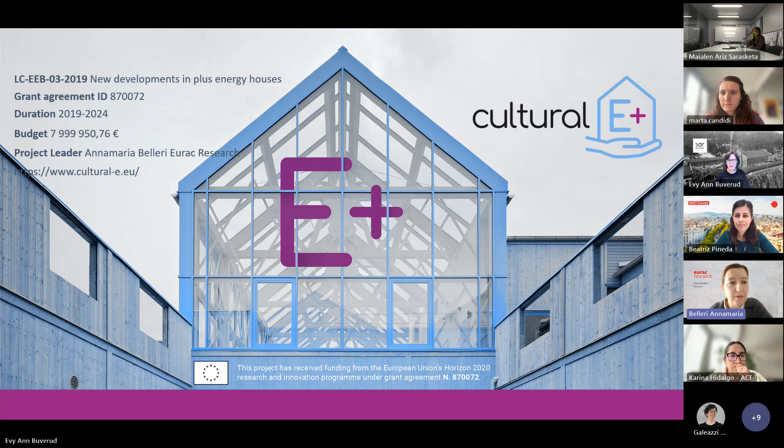We worked a lot on defining what is a plus energy building, and here's our definition: a plus energy building is an energy efficient building that produces more final energy than it uses via locally available renewable sources over a time span of one year.

It's not only about balance, because the plus energy building should also be flexible enough to ensure a good dynamic matching between load and generation, reduce as much as possible the greenhouse gas emissions, and also ensure added value for the users, providing accessible, comfortable and healthy indoor environments.

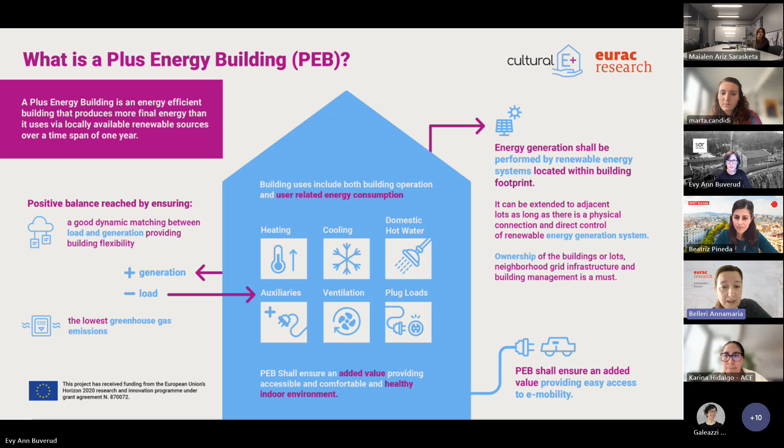The energy generation shall be performed by renewable energy systems, typically located within the building footprint, so typically photovoltaic systems. The location of renewable energy production could also be extended to adjacent building lots, as long as there is a physical connection and the management of the energy generation system is directly controlled by the building ownership. It should also be e-mobility ready.

So the effort done within this project was to analyze a set of solutions that aim at meeting the target of plus energy, but also doing it in an affordable way. In the end of the project, we had 4 demonstration cases located in different climates, but also different cultural contexts.

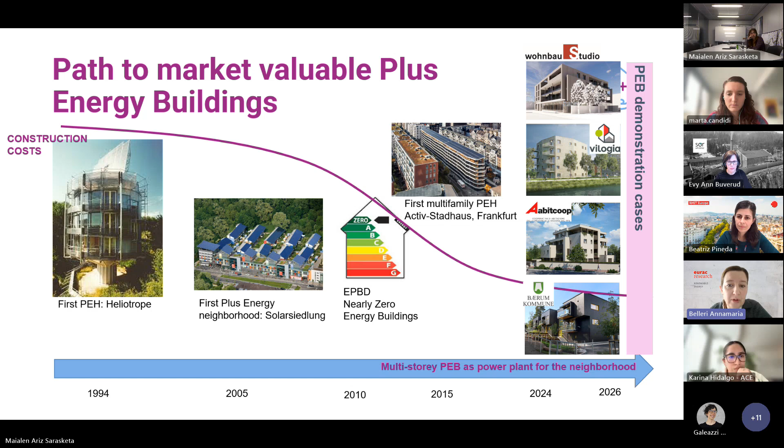One of the main pillars of our work was also to understand the social and cultural differences that characterize the way people use and interact with the buildings.

We summarized all our results in the design guidelines that you can access either through the PEB HUB or through this direct QR code link. We summarized them in 7 key design principles, and that's how the design guidelines are also structured. This document is a kind of easy access point to all the project results.

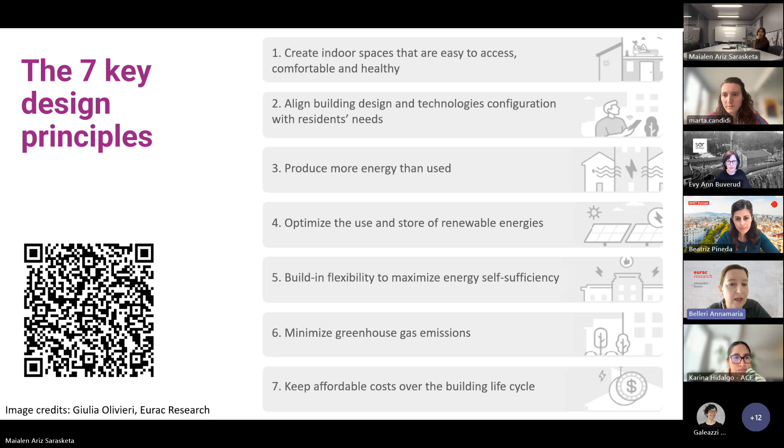If you are interested in looking at the results of the project, I suggest starting from these guidelines, and there you can find also all the links to the other reports and publications produced, in case you want to deepen some aspects related to that.

Here is the link, and I also put the link to our YouTube channel, where you can find the final project event.

Now I'll leave the word to Beatriz for the presentation of the updates on the PEB HUB.

Thank you, Annamaria. As Annamaria mentioned, I will guide you through this Plus Energy Building Hub platform. It starts as a repository, but aims to become a community dedicated to advancing Plus Energy Building design. This is a community for PEB professionals, so architects, but also engineers, researchers, and professionals who in different ways, through their different disciplines, are contributing to this Plus Energy Building new landscape that we are facing in Europe.

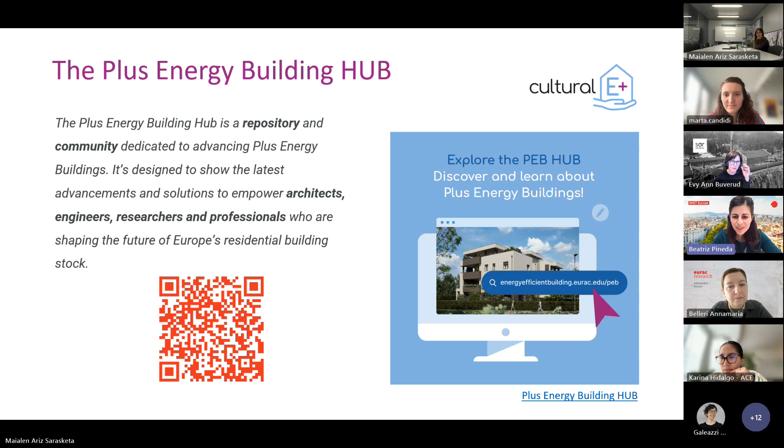This is a QR code that if you scan it will guide you directly into the platform. I will also give you now a walkthrough of the platform, so bear with me, and you will get a first-hand guided tour. But before that, this is just to explain, for those of you who might not have yet visited the PEB HUB, what can you find there.

This is a platform where you can find, first of all, real-world examples of Plus Energy buildings, with details on the technology solutions, performance data, envelope innovations, climate adaptive designs, but also, as Annamaria was mentioning before, this is a project that has paid special attention to cultural and climatic considerations that are also being gathered in the PEB HUB.

This is also for you to check, we will see this in a minute. The design guidelines are also in the PEB HUB, as Annamaria was just explaining. And we have sections of tips by designers for designers, because we think it's very important that designers themselves share practical advice to help and support others who are maybe starting this endeavor to build a Plus Energy building. Then there is also a quiz.

This is a simple interactive explanation of what are Plus Energy buildings, because as you know and are very well aware, Plus Energy buildings are still a niche, and basically we need to also raise awareness among the general audience on what is a Plus Energy building, to inform more non-specialist audiences.

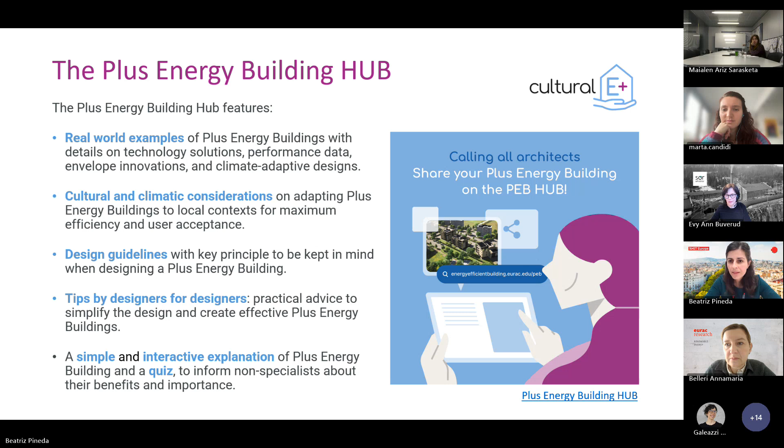So if you go to the QR code and land in the Plus Energy Building repository, this is what you see. It's worth mentioning that the PEB Hub is embedded within an umbrella platform, the Energy Efficient Buildings Hub, developed by EURAC Research. One of the tabs is the Plus Energy Building Hub, but you can also check out the Industrialized Deep Retrofit Hub, which we're not covering today. So we are focusing today on the Plus Energy Building Hub.

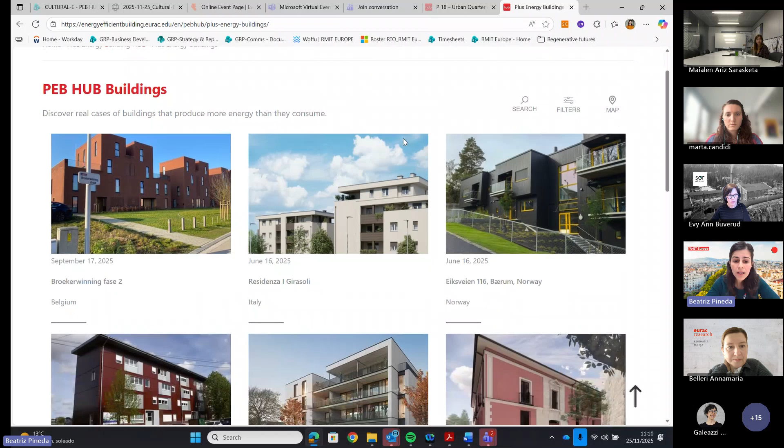Here, as I was mentioning, you can find different real-world examples. Today we will focus on one. For example, we can choose the P18 urban quarter on Priesnitzberg in Stuttgart, Germany.

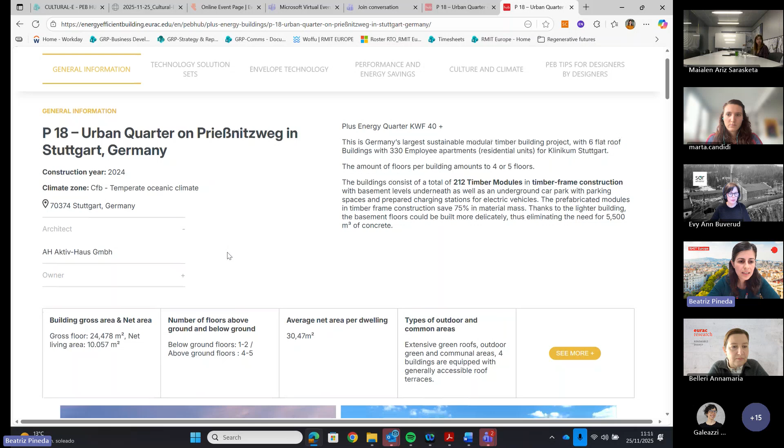This is an example of a designer who has been introducing data on their PEB. Here you can find very straightforward information: who is the architect? In this case, AH Aktiv-Haus, the owner, a brief description of the Plus Energy building, then general information such as building gross area, net area, number of floors, and so on. You can read it yourself.

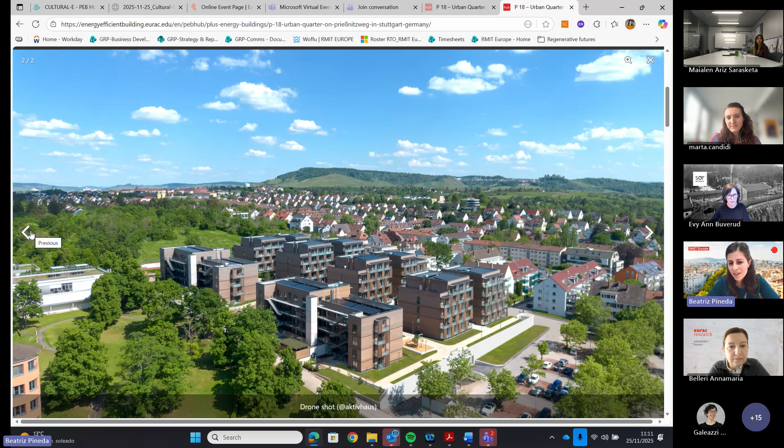You can also go into detail on some of the photos if you click on them. Let me show you this in more detail. By the way, this has been beautifully designed by EURAC colleagues, so thank you to Olga and Ludovica for their hard work on designing such a beautiful platform.

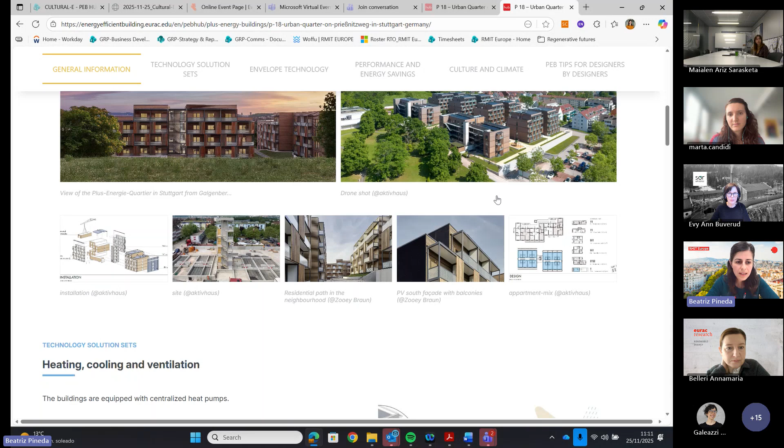Here you can see this bigger, with all the details on installations, construction, and different types of photos that the designers have provided. Then there's the technology solution set section, where you can learn more about heating, cooling, ventilation, building technologies, types of systems, the technologies behind them, and distribution systems.

The designers have also provided information on, for example, primary energy demand and renewable energy production. These are all things you can go through and learn more about this Plus Energy building in general.

Then you have information on the building envelope, with images provided for that purpose, such as wall, roof, window U-values, and other data that's quite important when you design your building and that you can learn from.

And then you have the culture and climate section, where you can understand, by going through this survey that the designers themselves have answered, more about how they've taken into account different practices that households perform when living in those PEBs, such as heating, cooking, ventilating, and opening windows, for which purposes.

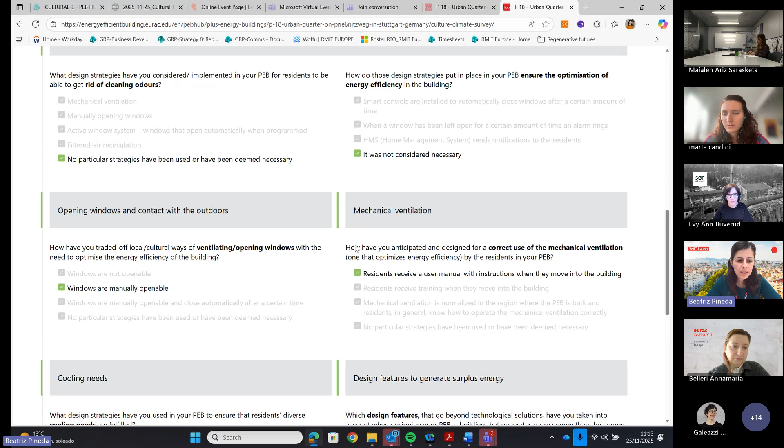To clean, to ventilate when cleaning, or to open windows just to be in contact with the outdoors. There's also information on mechanical ventilation, cooling needs for specific climates, and specific design features that have been generating this surplus of energy.

This is just one example, and of course there are many other examples of Plus Energy buildings in the repository. We welcome your contributions as well, and this is one of the updates we've been working on.

Now, if you go directly to My Plus Energy Building, you can create and update data on your own Plus Energy building. First you have to log in, sign in and create a password, and then we'll provide you access so you can go and create a building.

So you can call it, I don't know, PEB example, and start inserting information directly in a very straightforward way. Thanks again to our EURAC colleagues for this very user-friendly platform.

You can start inputting general information here. You select the type of climate, the country, and the address. As you'll see, some fields are mandatory, others are more optional.

You can add information in the general information section, the same as we've seen before. For the technology solution sets, you can also upload images directly. This is just for you to get an understanding of how you can input this information yourself.

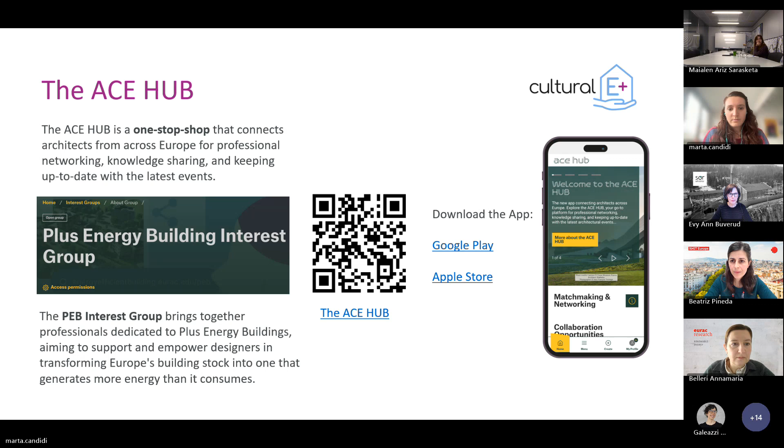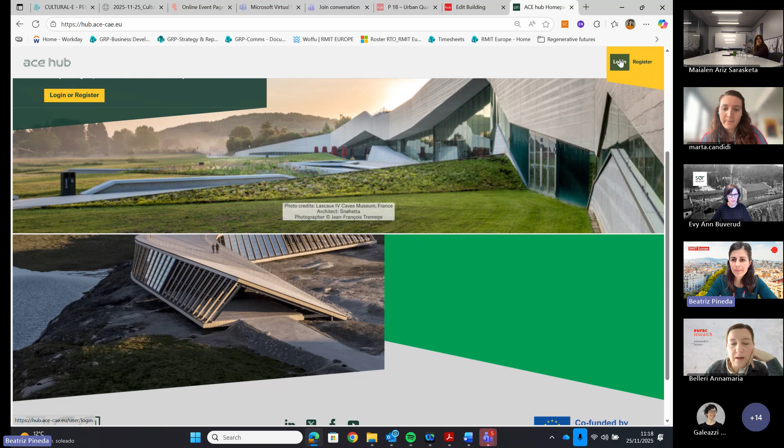Beatriz, can you share the screen? Yes, thank you. Let me know when you see it. Wait a second, the right one, this one. Perfect. I think you need to log in. Yeah, yeah, maybe I have already logged in, so maybe I can share it, Beatriz, if you don't mind. As you wish. Yes, thank you.

Okay, so as you can see, in the meantime, this is like an online platform, but it's also an app that you can download on your phone.

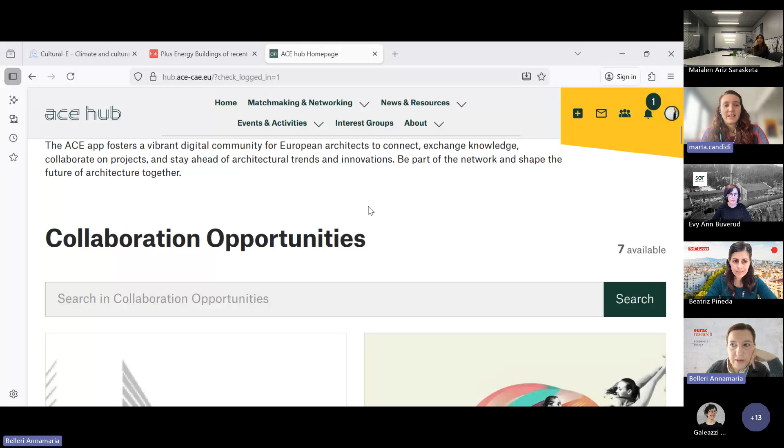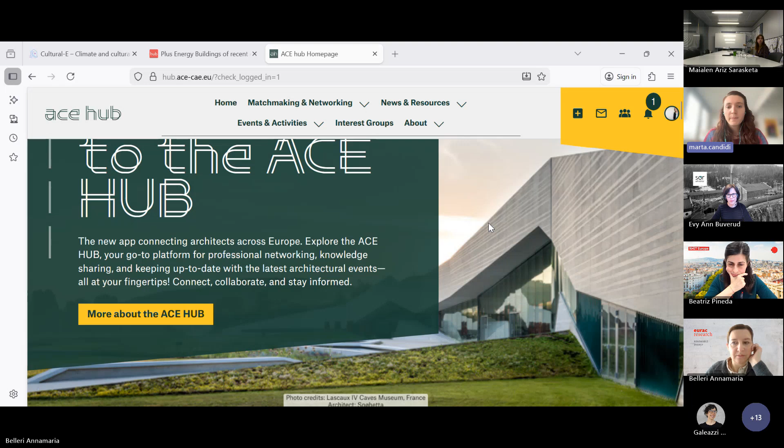Okay, now you see it. Yes. So maybe this is the homepage when you log in, and here you can find all the tabs. Basically, you have the matchmaking and networking part, where you can find collaboration opportunities, job and internship opportunities, and also the users directory, where you can see the members inscribed in the platform. Then under news and resources, you can see the latest news, publications from the Architects Council of Europe, but also from the EU on interesting topics, plus publications that all users can upload. On events and activities, you have a calendar where you can see both past and upcoming events. And then you have the interest group parts.

The interest groups are aimed to be communities that gather people around themes and topics in architecture, and the idea is that they facilitate collaboration and idea sharing. For the Plus Energy Building, we decided to create a community that can gather professionals and give them space to communicate and share ideas.

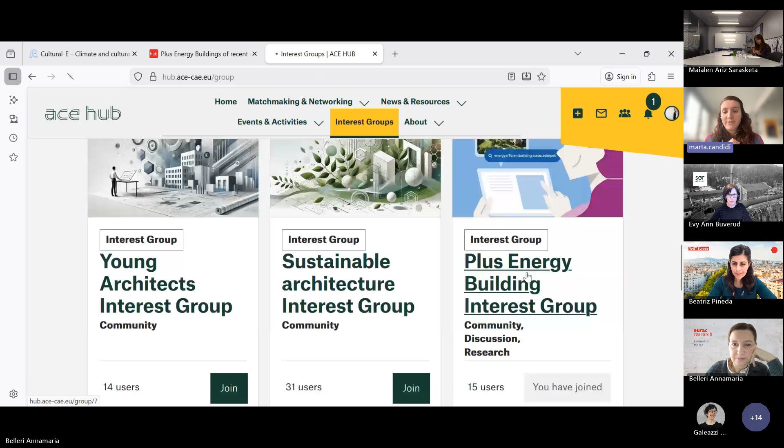Thank you, Annamaria. So if you scroll down, you can find this Plus Energy Building interest group. I will show you briefly how the group works. Basically, when you enter, you have all these tabs: stream, about, events, topic, and users. It works like the ACE Hub in general. In the users tab, you can see who is actually in the group, their job title, where they work normally, and if they add more information, you can see it and connect with them.

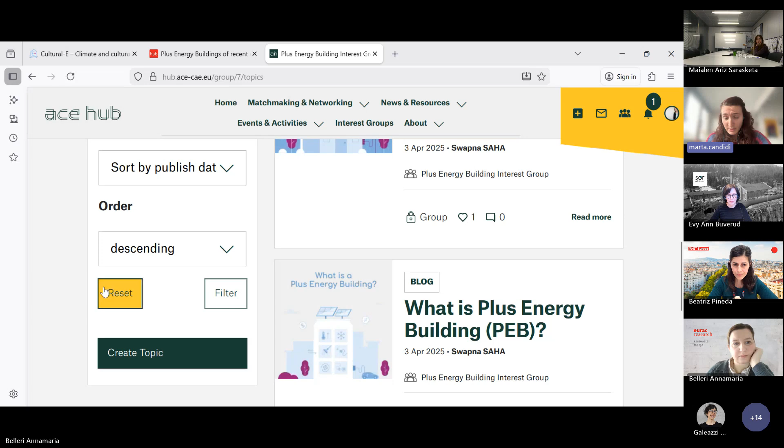Then close to that, you have topics, which is where you can share interesting information. If you go down on the left, you have this create topic button. We are currently working to make this platform a bit more user-friendly, so ACE is working on this, and hopefully next year it will be easier to use.

And then you can do the same for events. If you click now, for example, you see the webinar from today, and you have the same create event option. On about, you just have a description of the interest group. And when you see the yellow part up on the right, there you have all the features to use the hub in general, so when you want to add any kind of item, you can do it there. Then you have your messages, you can see the groups you are into, and then you can see the notifications.

Okay, thank you, great. So I guess now is the time for our speakers. If you can again share the screen, Annamaria, with the presentation. Our first speaker is Evy Ann, an architect and partner at Sør Arkitekter, and she will be presenting the nursing home in Eiksveien, in Baerum, Norway.

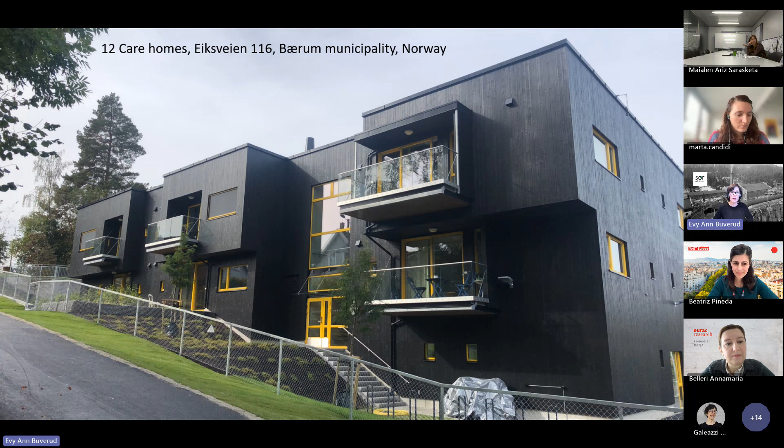Hello, I'm Evy Ann from Sør Arkitekter, and I'm going to present Eiksveien 116 in Baerum municipality in Norway. This is the Norwegian demo project in Cultural E. It is a residential building with care home for people with special needs. There are 12 apartments, located in a rural area in Østerås, about 11 kilometers from Oslo.

It has a lot of welfare technology. The building has a high environmental profile and is built with solid wood constructions. It's a passive house and FutureBuilt project, certified BREEAM-NOR Excellent. It has been a learning project. For example, use of visible solid wood inside the building is demanding in relation to fire and zone regulation in this kind of building, and there was a lot of discussion because no one wanted to take any risk, but it landed at least.

There was a zero emission construction site, and the building is a part of Baerum Municipality Climate Strategy 2030.

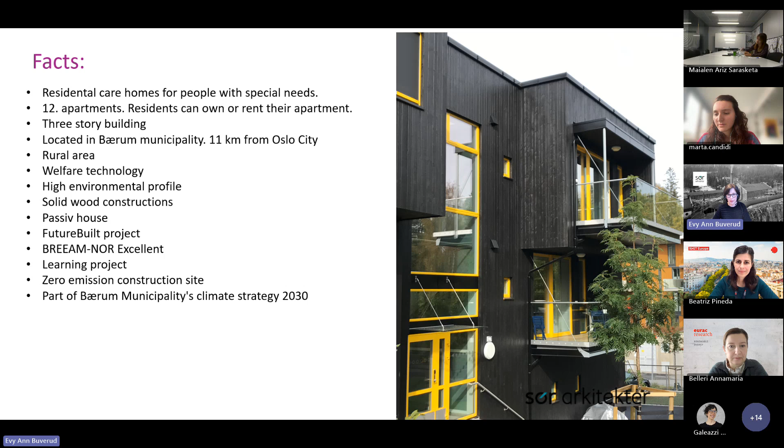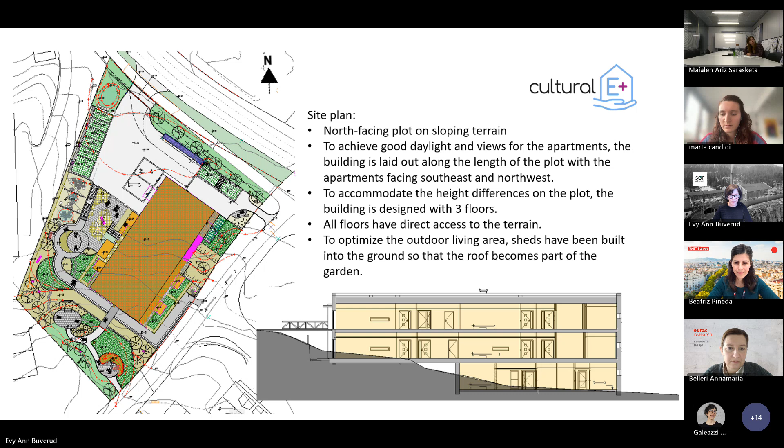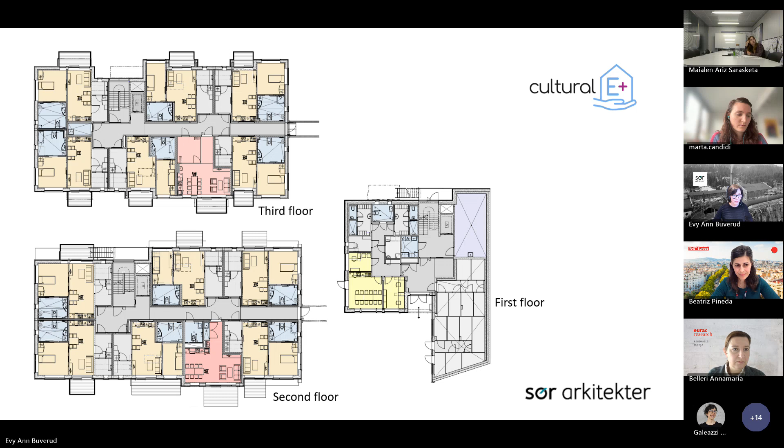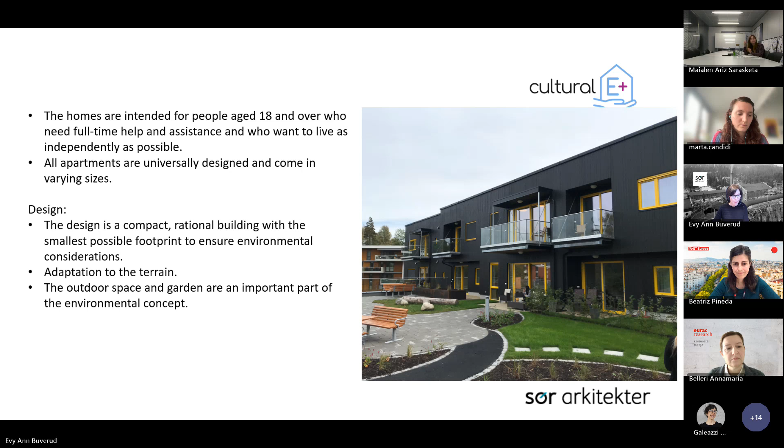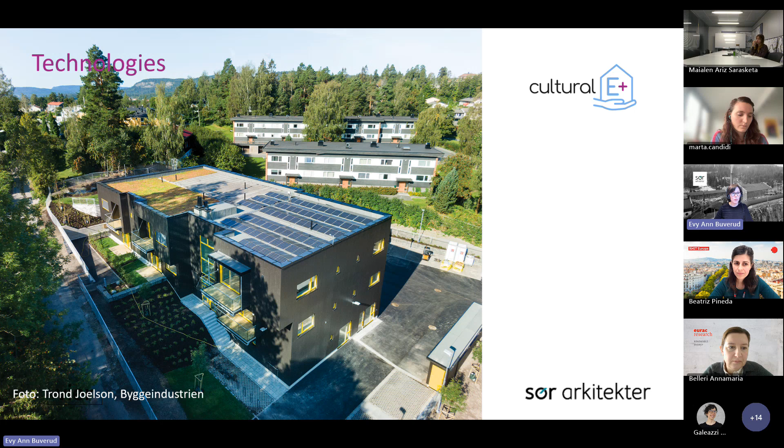There's a lot of technical things in the building, and we have balanced mechanical ventilation with heat recovery, water-based floor heating, hot water from central boiler, and we have AMS to record electricity consumption for each apartment. There's a lighting system with motion detectors in common areas, and the central control and building management system BMS are installed. There's a lot of sensors, high resolution data from 300 sensors. That's quite a lot for such a building.

When we came to heat and energy source, we have a heat pump with electric boiler for the peaks. There are 3 geothermal wells, PV solar panels on the roof, battery storage, and EV charging.

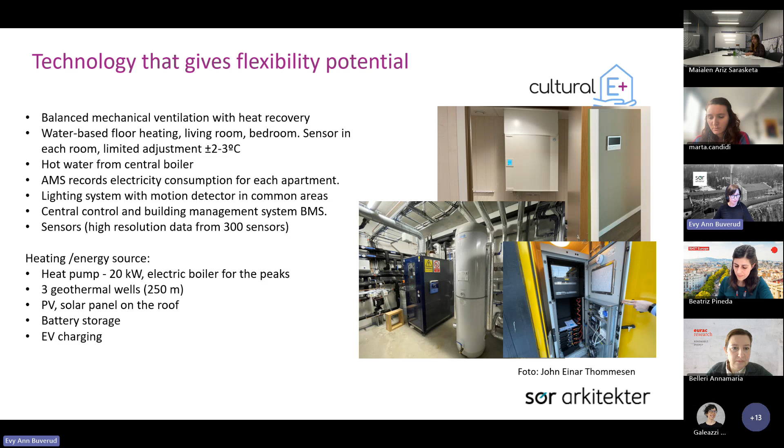There's the building from northwest, and we can also see how the building connects to the different levels on the garden.

So how much energy plus? The building itself is extremely energy efficient, but less than 50% of available surface space on the roof is utilized with PV. With 100%, the building would produce more energy than used. Currently, the building is not a plus house. It would be if the entire roof surface was covered with solar cells. It's prepared for such an expansion. However, the project could then lose blue-green values and score lower on the LCA. So that's a decision which the building owner made.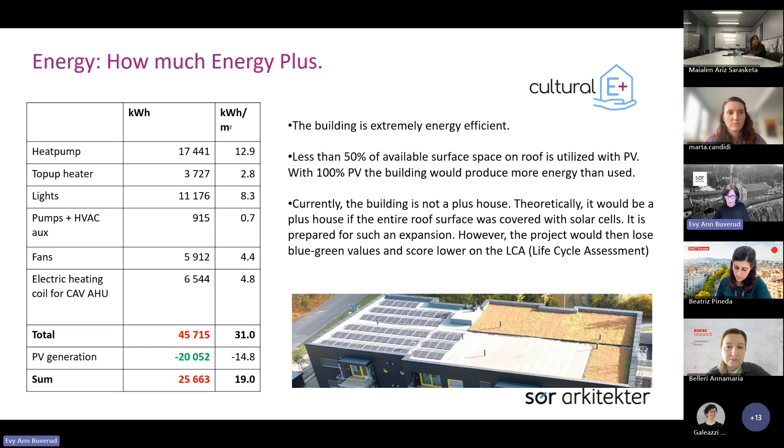So what challenges did we meet? We had a challenge with the design of the building. It was a small sloping north-facing plot with high demands on area efficiency. The design team was established late, so we got very short time frames.

There was also a change of assumption. The battery storage came quite late in the process, and then there wasn't any space left in the building, so we had to find room in the bin shelters. We also had to apply to the authorities for this, and it took some time.

There was also a challenge with technical competence. This building requires technological competence that many residents don't have. These are apartments for people with varying degrees of mental disabilities, and at the same time there's a high frequency of assistants, so it's not realistic that all of them have the necessary knowledge to optimize energy use.

We also have social and cultural conditions. In Norway we sleep with windows open, even during the winter. And in this building, several residents smoke, but in Norway we don't smoke inside, so doors are opened frequently, and that means a loss of energy.

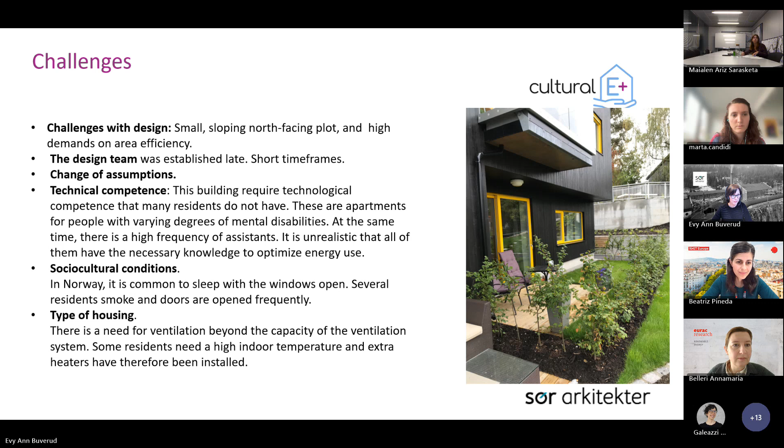So what lessons did we learn? Some of the lessons were that the criteria for energy level have to be included from the start of the design. That's important. And interdisciplinary collaboration from an early phase is important.

Emphasize basic design principles. The shape and orientation of the building affect energy consumption, and we worked a lot with that. Construct good climate shells with high insulation values for walls, roofs and windows. Area efficient solutions are important, and if you initially have a very energy efficient building, the road to a plus house is very short.

We also have to consider who will live here. Advanced technology requires educated residents. So at last, the goal is creating a good building with the least possible negative impact on the environment. This will sometimes mean that blue-green values are prioritized higher than maximizing energy production.

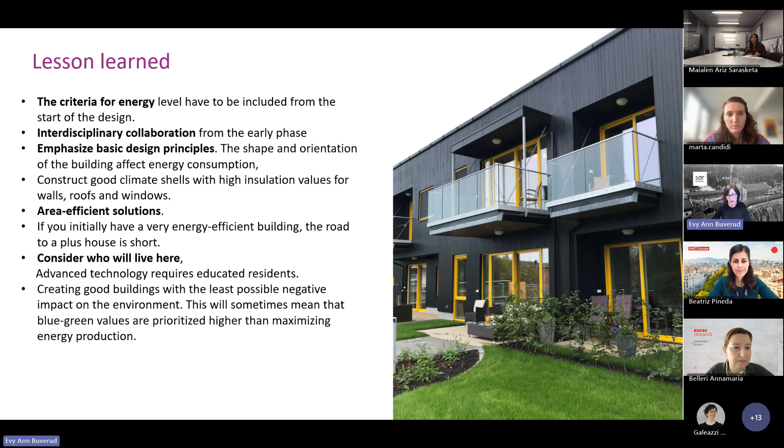Thank you, Evy Ann. Thank you very much for the presentation. I think it shows some of the challenges and the trade-offs you were explaining and making, prioritizing, optimizing energy production or valuing other aspects more. I think these are good points for the discussion.

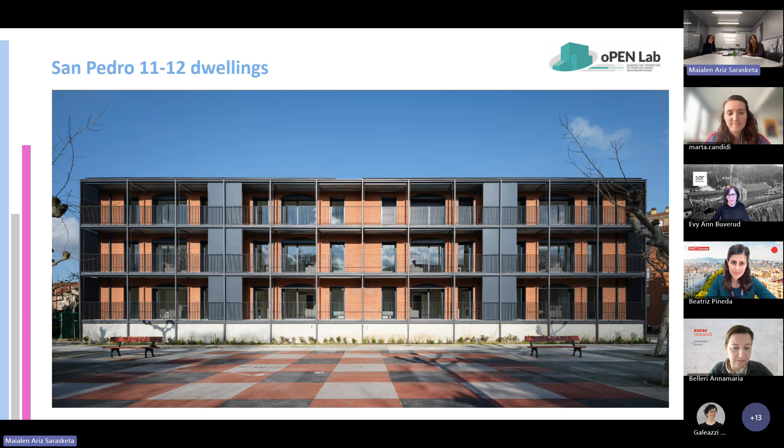This is the building we are going to speak about, and this is a current photo of the building. We are going to tell you how we transformed a 1950 building into a plus energy building.

First of all, I would like to tell you a bit about the location. The building is located in the city of Pamplona in northern Spain. This is a working class neighborhood, one of the oldest neighborhoods in the city from the 1940s, and also one of the most crowded neighborhoods in the area.

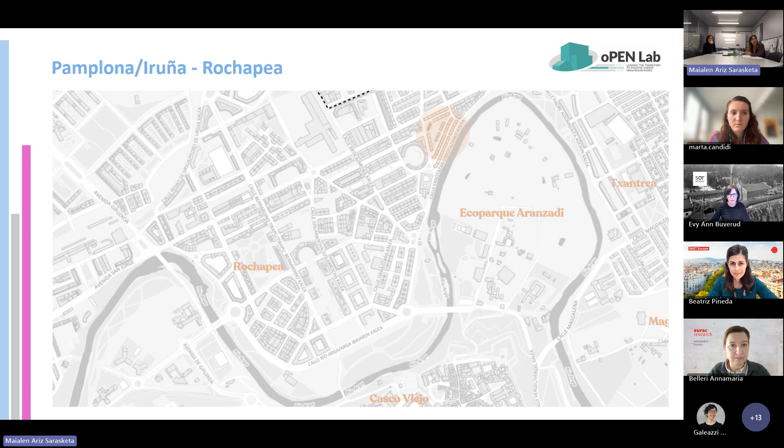This is also important for you to know, because the transformation of this building was possible thanks to the Open Lab project, a European co-funded project under the Horizon 2020 program. La Rochapea was the Spanish demo lab of this project, which consisted of creating positive energy neighborhoods through an open environment and a living lab approach.

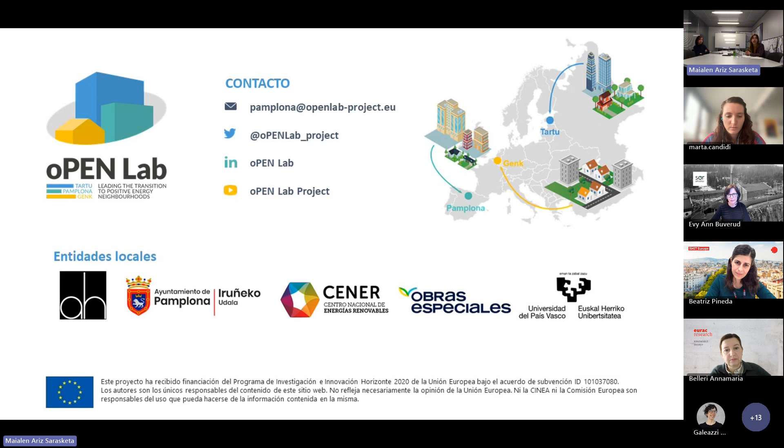So not only the transformation of the building, which finished last summer, was important, but also the monitoring we are currently doing. I would also like to thank all the local entities working on the project: AH Associates, CENER, Obras Especiales, and the public university from the Basque Country. We were the Spanish demo lab, but we also had colleagues in Tartu, Estonia, and in Genk, Belgium.

So with all of this said, I will go on to explain further the information about the building. This is an old photo, not of the 2 blocks that we transformed, but of a building from the group, so you can see more or less the main characteristics.

It's a 3-story building consisting of 2 blocks, 6 apartments in each block, so 12 apartments total. Each was already quite small, about 60 square meters per apartment. There was no elevator in either block. The structure was reinforced concrete frame with columns and beams, and a structural brick wall facade.

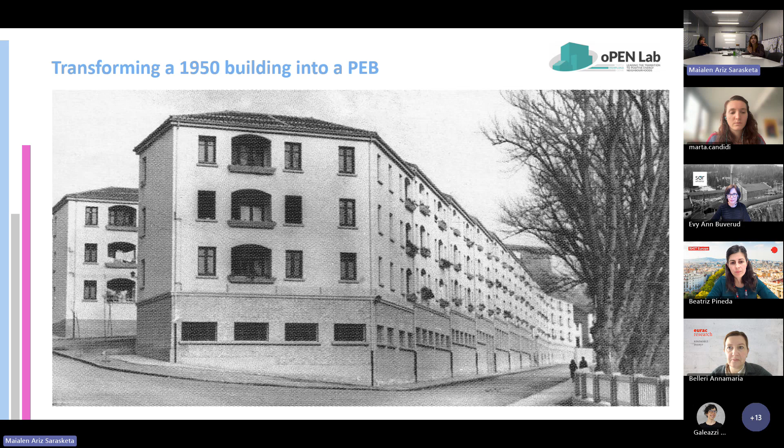So it was a quite constraining structure. In the 1990s, some important rehabilitation works were done, consisting of water supply and aligning interior, but not anything significant regarding installations. So the challenge was major, because we had a quite old building with a constrained structure.

No modern installations, and already quite small apartments. And we wanted to transform it into a plus energy building. So first of all, the passive strategies were really important.

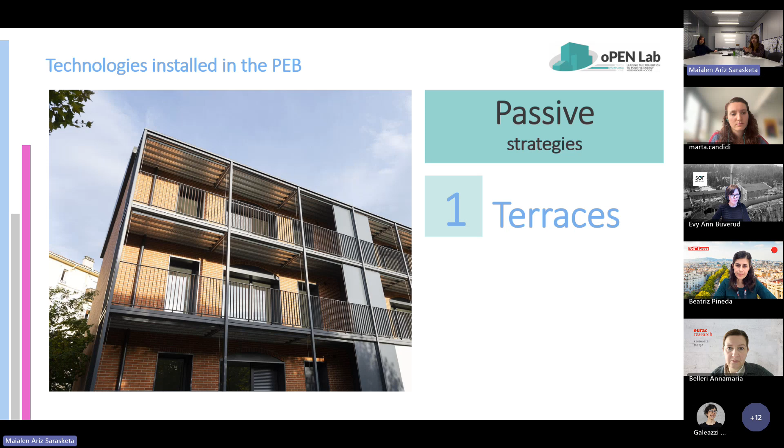The first passive strategy was to create an outdoor terrace industrialized system. With this strategy, we gained some outdoor space, but also protected the southern facade from solar radiation, avoiding intensive heating and reducing the energy demand for cooling. We also installed automatic exterior blinds that raise or lower according to heat and wind conditions. So this was the first big design decision.

I don't know why you don't see the photo. I think you don't see it.

But the other very important decision was creating a high performance thermal envelope. In this case, we installed 25 millimeter vacuum panels and a wooden lining system on the interior of the facade, and with this strategy we already achieved this high performance thermal envelope.

The reason we chose this system was that by insulating from the interior, we didn't change the image of the whole building group. Also we needed a really thin lining because we couldn't afford to lose more interior space of the apartments. And to complete the insulation, we also installed the same system in the roof, in the ceiling, but with a thicker solution.

Oh, you see the picture now. Okay.

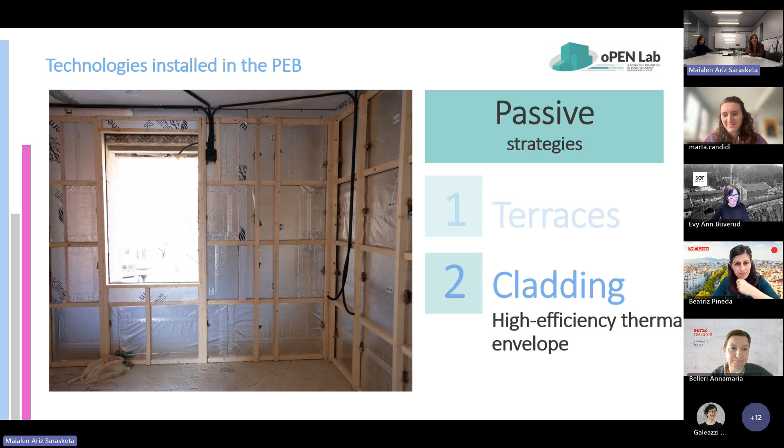Well, these are some final images for you to see, like the final result.

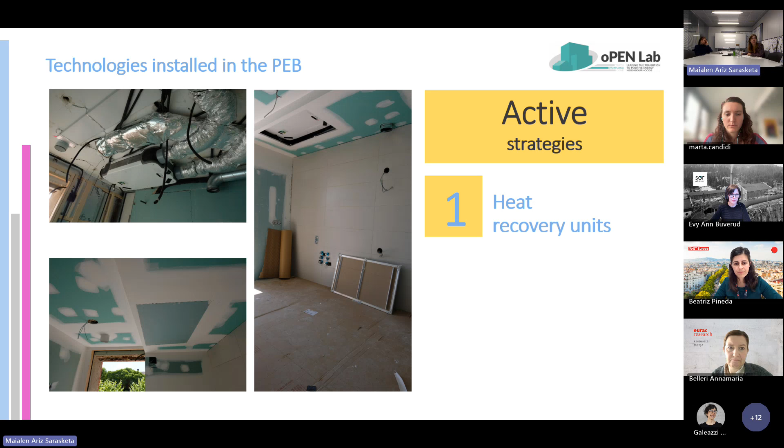Once we had made sure that we had minimized energy consumption as much as we could, we thought of active strategies. First of all, we installed heat recovery units, whose aim was also to minimize energy demand, and they also worked with the ventilation system of the building.

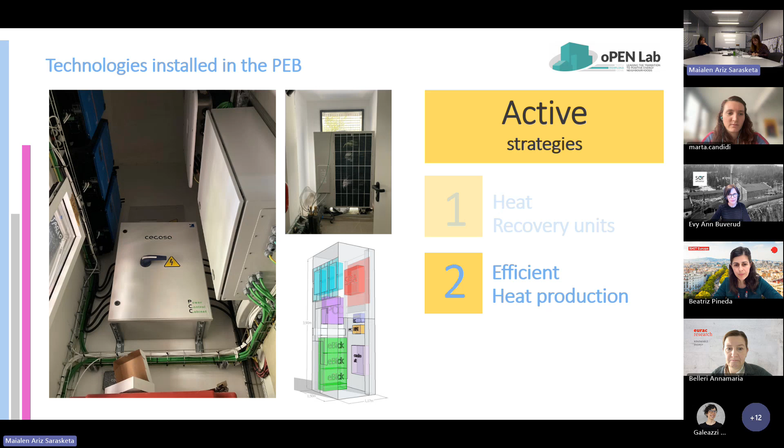Then we maximized the efficiency of heat production systems by installing low GWP heat pumps that generate both heating and cooling. We also put separated storage tanks to ensure proper insulation and prevent heat losses.

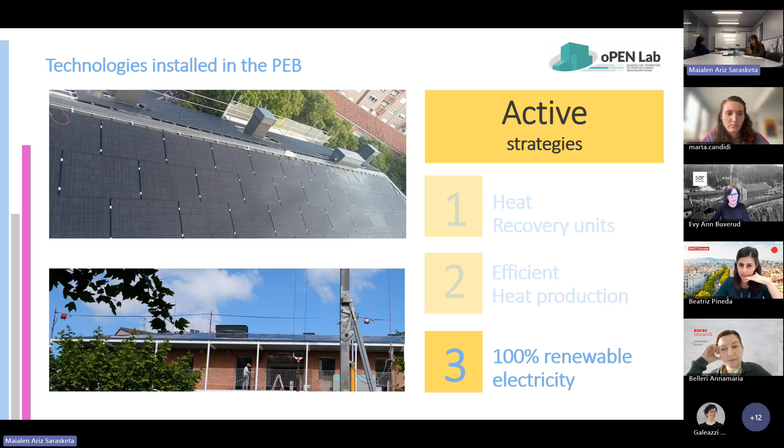It's also really important to mention that the energy of the building comes from solar panels in the roof. Solar panels have been installed across the whole roof, a surface of 380 square meters. So the energy produced by these solar panels is used for the building's self-consumption.

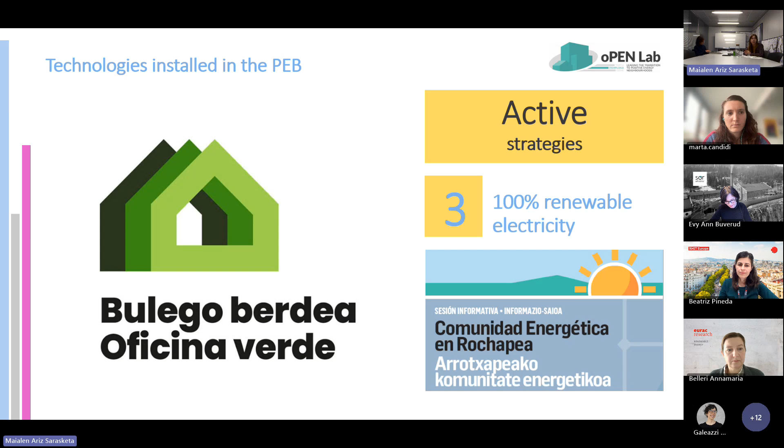But the surplus is directed to the rest of the plus energy neighborhood. So an energy community already exists that is developing different initiatives to use this energy. The city council has also promoted a green office to help the energy community, and in general to help all the neighborhood develop these strategies.

Besides this, it's also important to mention that the whole building is full of sensors, and automation of all devices has been developed for the inhabitants to control the heating system and to monitor the building, trying to make them responsible or accountable, to know what's going on with the building's installations.

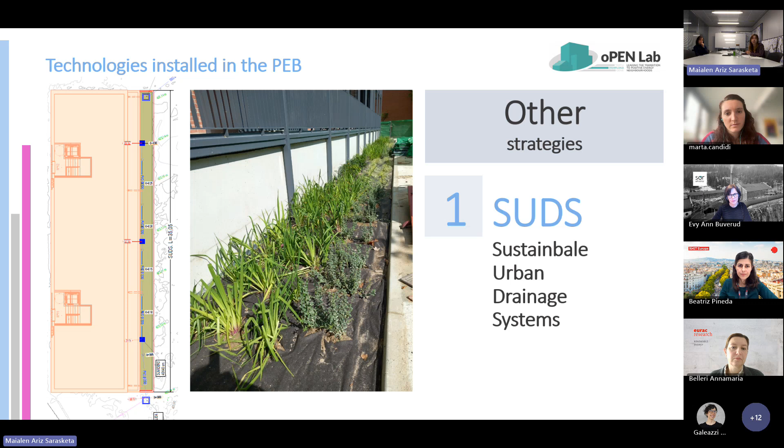It's also important to mention that in other renovations we are doing, we are introducing other kinds of strategies related to plus energy buildings, and we did so here too. So we installed a sustainable urban drainage system, which takes half of the rainwater from the roof, and EV chargers were also installed in the building.

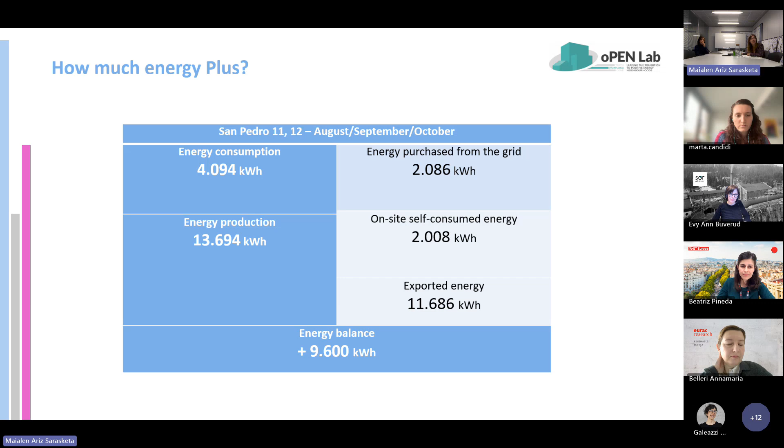Talking about challenges, I think many are shared with Eiksveien. One of the most important ones was what I mentioned before, that we had a really constraining existing building, and we needed to implement all the installations and all the automations of the building.

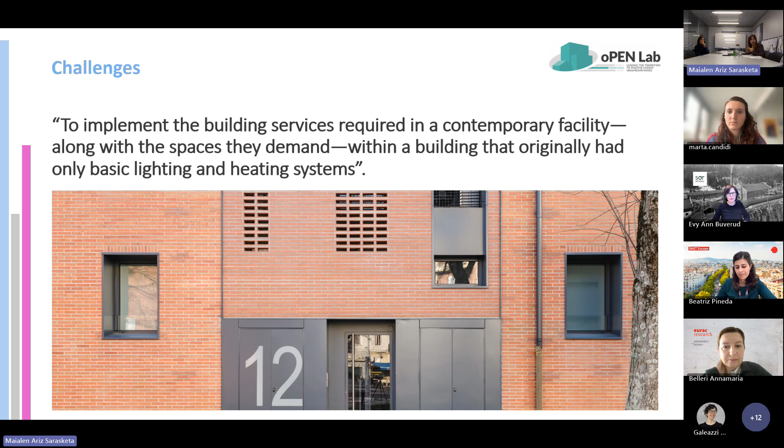Also, some of the important challenges we faced were cost efficiency, because we have installed very modern installations. And as we want this to be a replicable solution, we need to think about how to optimize these costs. And also, as Eiksveien was mentioning, the technical competence of users.

Currently, the City Council is helping and giving information to the inhabitants of the building in order for them to know how to use it. But this is also a big challenge because of the socio-cultural conditions.

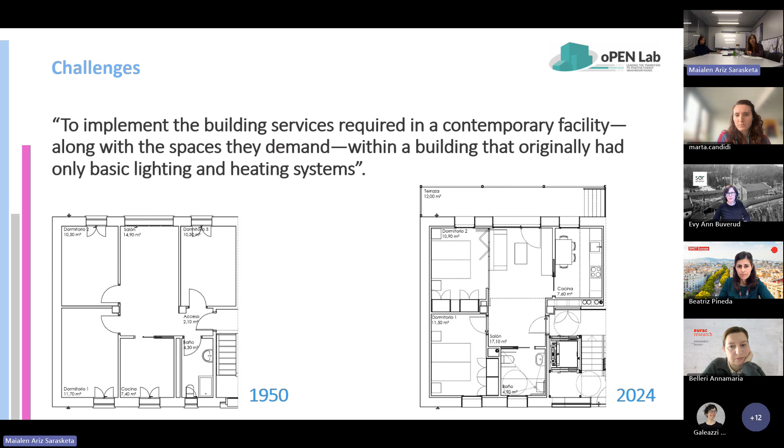It is also important to tell you that in this case, the apartments have been handed over to different associations that work with people with disabilities. And we are aiming to give some of the apartments also to university students who can assist them while they're living here, both in day-to-day things and also in this dimension of modern installations.

So I think these were the main challenges, and the lessons learned could be resumed in the benefits of extensive teamwork and the power of great design decisions. And mentioning the extensive teamwork, I would also like to mention, besides the Spanish developed colleagues, also the full consortium for the opportunity and the help.

And that is for me. Thank you so much for listening.

Thank you, Maialen. And also thank you, Soledad. I know that you've been one of the main architects behind this project, which is, I have to say, I've visited, and it's beautiful. It is a very nice renovation project.